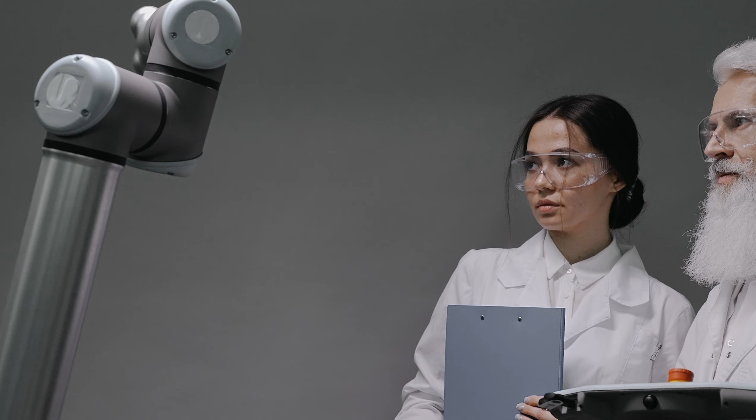Now, the main things that we need to understand when building our robot are the degrees of freedom, the kinematics, and the dynamics. Now, when we talk about the degrees of freedom in context of robotics, this refers to the number of independent movements a robot or a robot arm can make. Each degree of freedom represents a specific motion that a joint or link can perform.

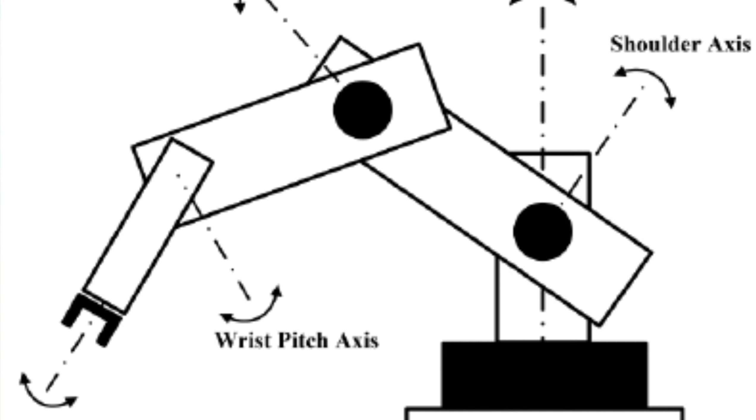For the robot arm that we're going to make, the number of degrees of freedom determines its flexibility and its range of motion. Since we're building a 5 degree of freedom, it means that the robot can move 5 different ways. Now, the 5 independent movements that will be involved in this robotic arm will be the shoulder rotation, shoulder elevation, elbow joint, wrist pitch, and wrist roll.

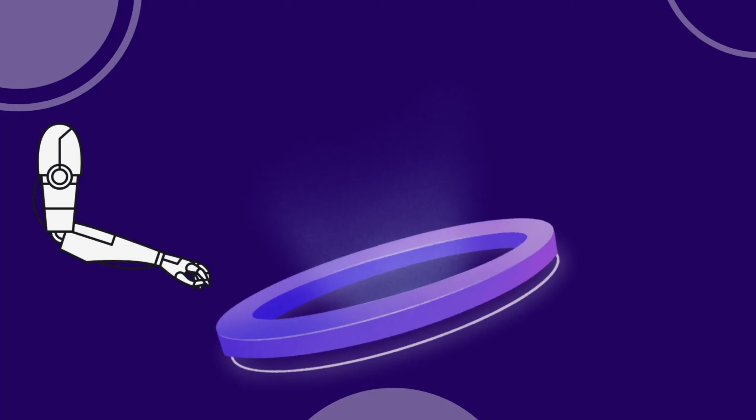Each of these degrees of freedom will enable the robot to move in various rotations and positions within its workspace. This will allow our robot to perform various tasks and maneuvers. When it comes to kinematics, this mostly deals with the study of motion in a robotic system without considering the forces or the torques involved. This mostly helps us understand how different parts of a robot move relative to each other.

In terms of the robot arm, kinematics is mostly applied in analyzing the joint angles and the link lengths to calculate the position and orientation of our end effector. Now, when it comes to robotics, there are 2 types of kinematic methods involved. There is forward kinematics and inverse kinematics.

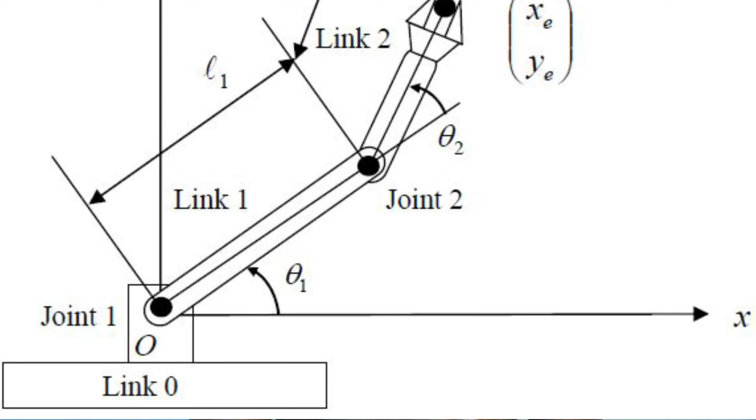When it comes to forward kinematics, we determine the position and orientation of the end effector based on the joint angles and the link lengths that we already know. To explain this further, if we're already given the joint angle and the link length, we will use that to calculate the position of our end effector. This is mostly used when we need to calculate where our robot arm should move to perform a task.

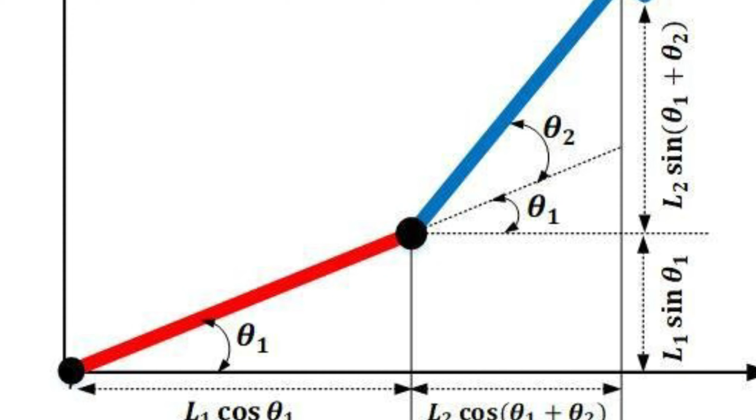When it comes to the inverse kinematic method, it's the opposite of forward kinematics. This is when we know the position and orientation of our end effector, but we do not know the joint angles that will produce that position and orientation. This method is mostly used in planning and controlling robot movements precisely, and for our robot arm, it's a method that we're mostly going to use.

Our robot will be Arduino based, so when we have the desired coordinates of our robot arm, we will use that to find the needed angles that will move our robot in the desired position. And when it comes to programming, inverse kinematics is mostly used.

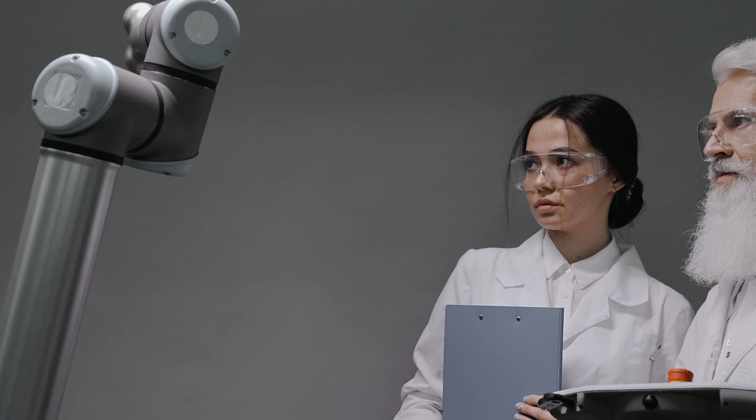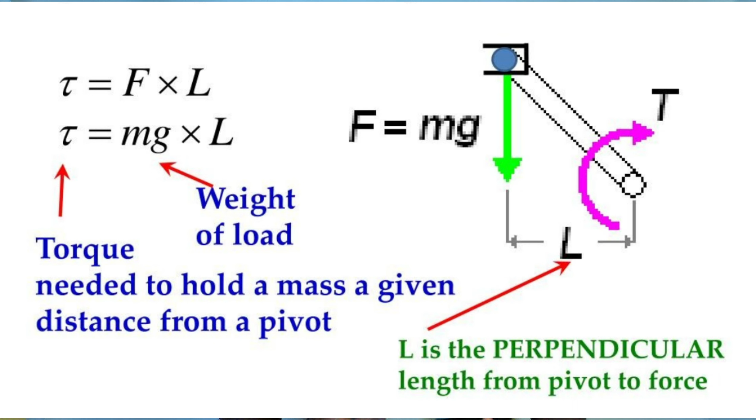And the third thing that we need to know and understand is the dynamics of a robotic arm. When it comes to robotic dynamics, this mostly concerns the study of forces and torques applied to a robot arm and how these affect its motion. It's essential to understand how the robot arm responds to external loads and how to control it effectively. Robotic dynamics mostly shows us how velocity, acceleration, and torque are related within our robot.

This helps us set limitations in which our robot can operate. These equations will help us design algorithms that will help our robot move smoothly and more accurately. Dynamics is crucial for several reasons.

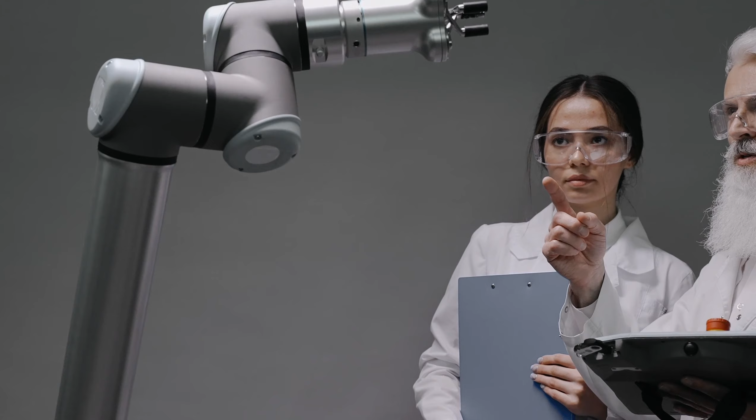Number 1, motion control. Understanding dynamics allows you to control the robot's movements more precisely. For example, you can adjust the motor torques to ensure smooth and accurate motion. Another one is safety. Dynamics analysis helps us prevent overloading of joints, which could damage the robot or pose safety risk. This is very important if we want to build our robot to be maybe applied in manufacturing, the mines, or in agriculture.

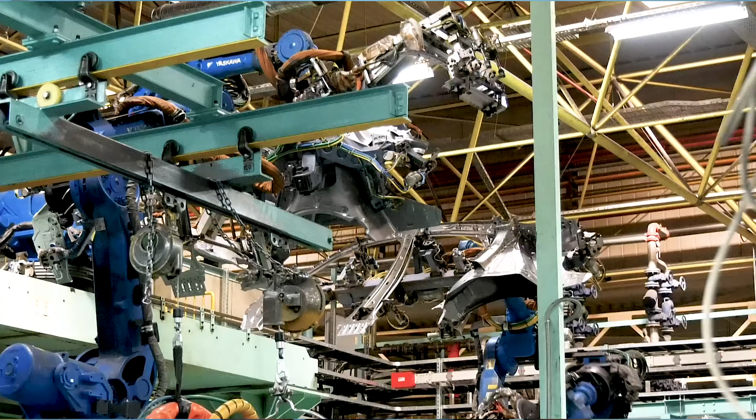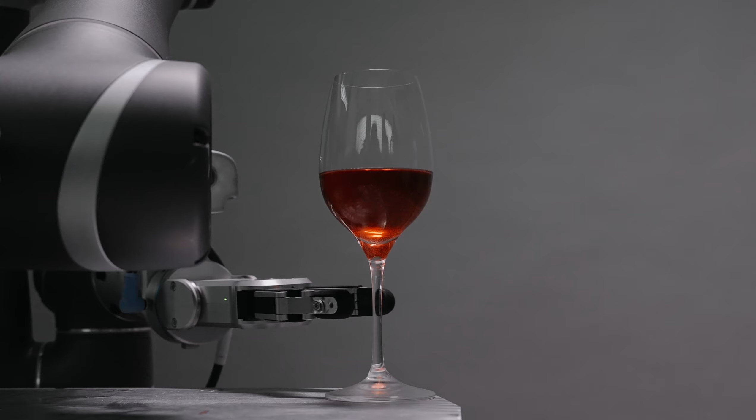Another reason why it's crucial is because of energy efficiency. Efficient motion planning and control based in dynamics can help reduce consumption, which is important for battery-powered robots. Another crucial reason is collision avoidance. Dynamics can help predict and prevent collisions by adjusting the robot's path or stopping it in time.

And lastly, feedback control. Dynamics information can be used in feedback control systems to correct errors in real time, improving the robot's performance. Feedback control is mostly important when it comes to automation, when we want our robot arm to perform specific tasks without the need of a human being to direct it. It's also important when it comes to machine learning and AI. The more the robot learns from the feedback, the more it will smoothly and accurately perform its tasks.

Now, for this robot design, dynamics is crucial because it's mostly going to be controlled through programming. Understanding dynamics will help us design and create the needed code that will make the robot perform smoothly and accurately without any issues.

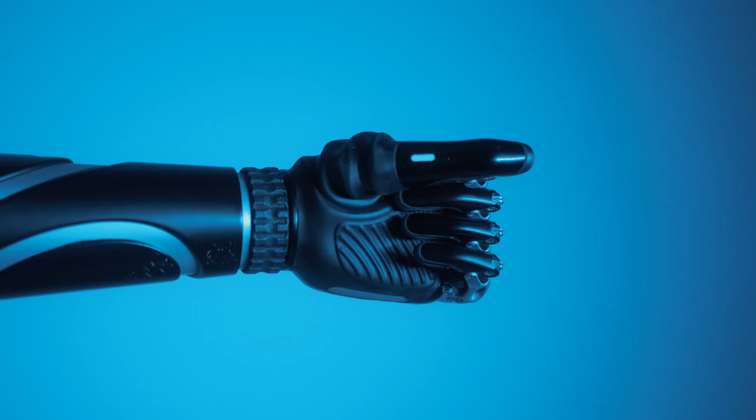Now that we've talked about the kinematics, the dynamics, and the degrees of freedom, we now need to move on to the end effector. The end effector is the part of the robot that is going to interact with the environment. For example, if we consider our arm to be a robotic arm, our hand will be its end effector. It will interact with the environment. The principle is the same when we talk about robotic arms.

Essentially, most robotic arm end effectors are similar to hands, but I would like us to design something a bit different. This is where the application of our design comes in. Now, when it comes to applications, it's important and fun to build robots as an engineer. But as an engineer, we also need to solve problems. So I would like the end effector for our robotic arm to at least solve one or more problems out there.

If possible, and we have enough materials, we'll design more than 2 end effectors that we can apply in the real world. Hopefully, in our second video, when we're physically building our robotic arm, I'll probably design a second end effector if we have the needed material for it.

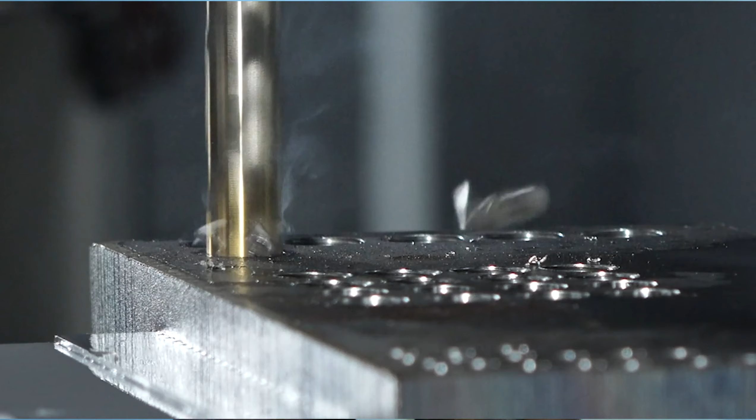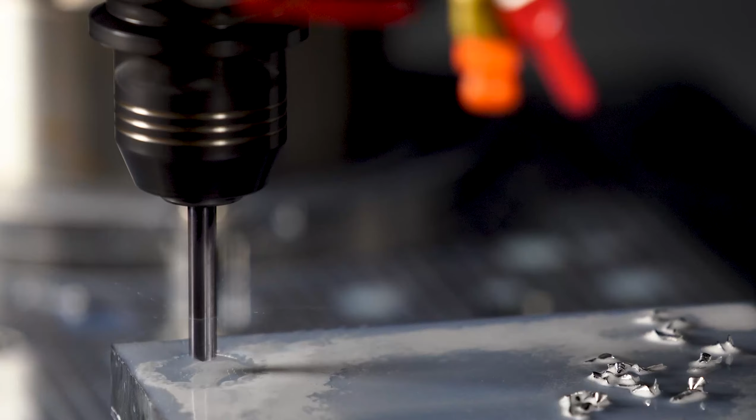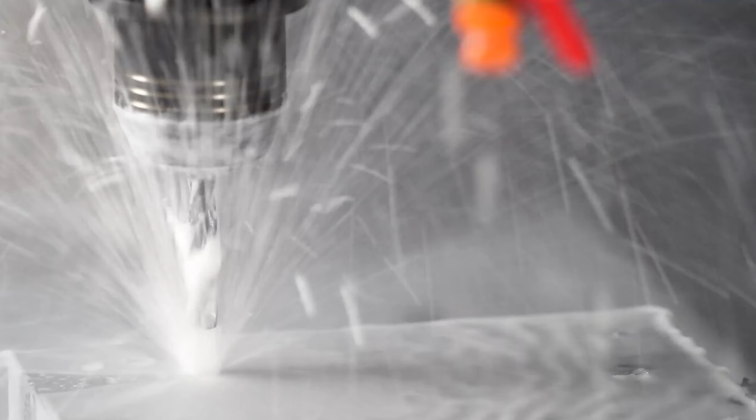Now, the reason why I selected drilling is because when it comes to mining or machining or agriculture, it would be good to have a robot arm that is automated to perform certain processes accurately. So when it comes to drilling, maybe drilling into an ore mine to get a sample or drilling into some wood, that would be beneficial in most industries.

It is also beneficial if our robot arm can drill into more than one part, meaning that if we would want it to drill into, let's say, more than 3 pieces, we would program it to do so, which will reduce time and make the person's work a bit more efficient.

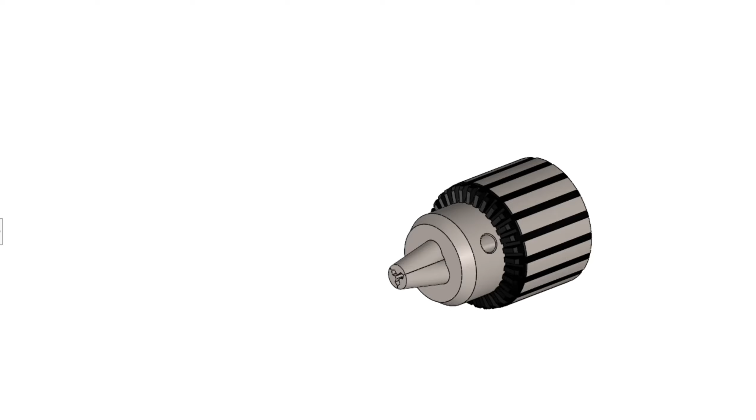It will be our base model for it, but I think over time, when it comes to finally building our prototype, a few design changes will be made. So now let's go to designing our robot arm. Like I said, I use SolidWorks mostly, but hopefully in the upcoming videos, I'll use other CAD softwares like Creo or CATIA. But for now, we're mostly going to use SolidWorks.

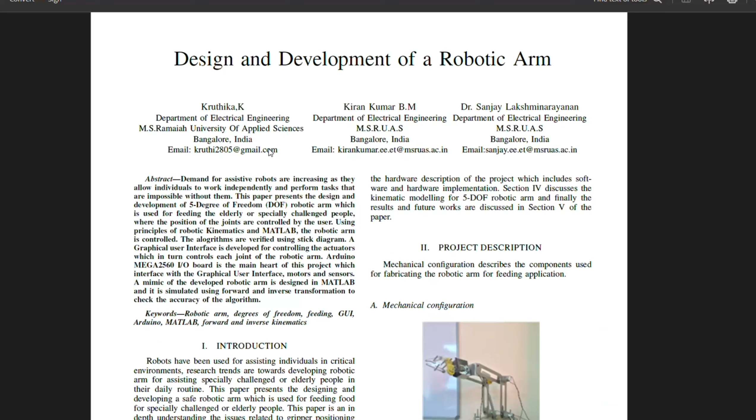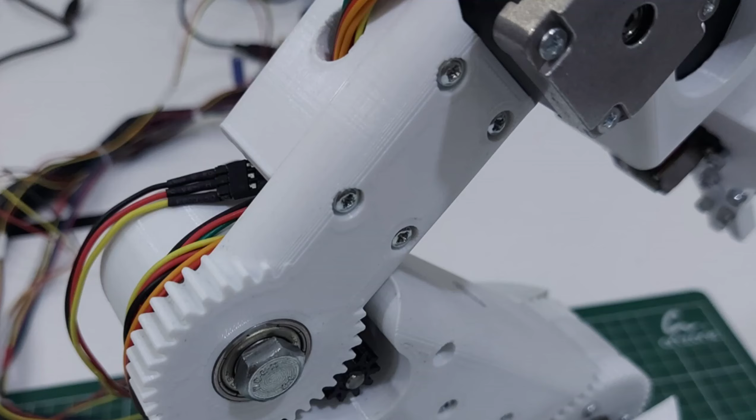I first started by doing research on the types of robot arms out there. This made me decide to build a 5 degree of freedom robot. During my research, I also used it to theoretically calculate the torque forces for each link. This helped me decide on the motors to buy. After looking at a lot of 5 degree of freedom robots, I then designed a 2D sketch on paper to help me envision the robot that I want to build.

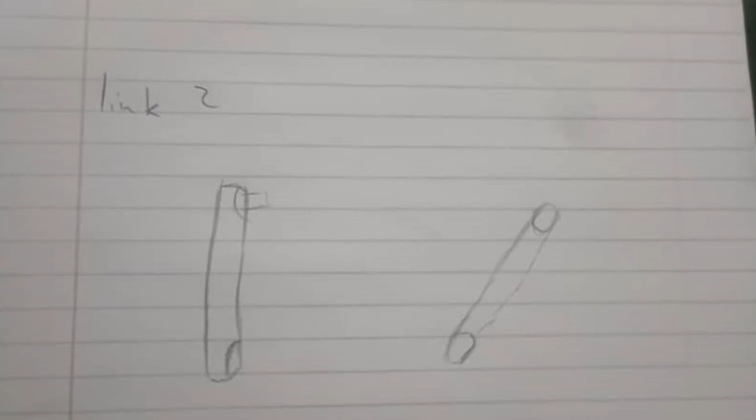I made it very simple so that I do not have any problems when it comes to 3D printing or CNCing each part. After that, I then went on to SolidWorks to build a prototype. Please note that this design is still under modification and simulation testing, but hopefully by the time the components arrive to physically build it, I'll have a final design to build.

Now, we can calculate the inverse kinematics and the dynamics of our robot arm, but it's also important to simulate how the robot arm will work in certain operations. And this is where finite element analysis comes in. So for the finite element analysis, I mostly used ANSYS Workbench, and I mostly checked its temperature, the modal analysis, and the static structure to see how loads are applied.

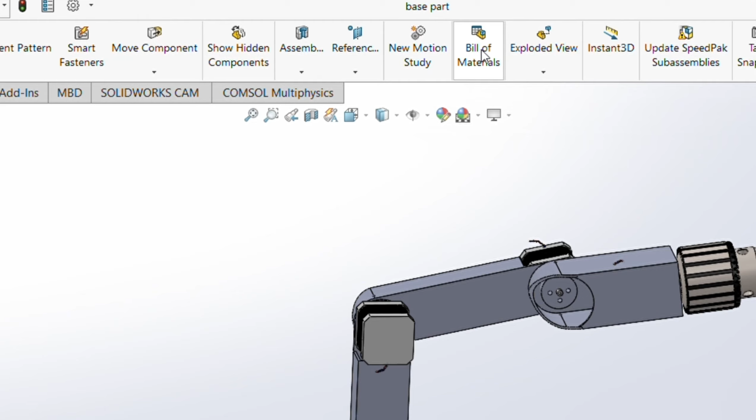So then, we come to what is known as bill of materials. This is a comprehensive list of components and materials that are needed to build our robot. In SolidWorks, you're able to create a bill of materials table of the assembly that you just made. The manufacturer will be able to know the quantity and the parts needed to build your final design.

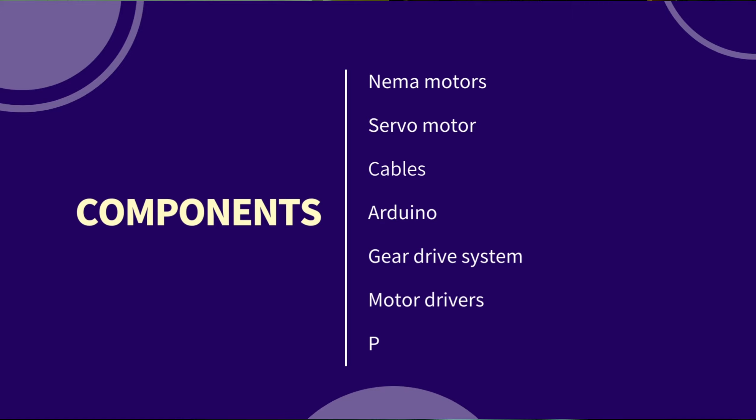So then, the main components that we'll need for building this robot are 5 stepper motors, I picked NEMA 17 for this, 1 servo motor, cables, Arduino Uno, gear drives which will help in power transmission and torque increase, motor drivers for the NEMA 17 motors, and a potentiometer to control the speed of the motor of the drill. Because when it comes to drilling into a material, we need to know that the harder the material is, the slower the speed is required. This is mostly to help us preserve the material and to prevent things like friction that might cause deformation and wear and tear of our tool.

One of the things that I want to try and do is program our robot to be controlled through a controller. No, not that controller, but a sophisticated controller. Most companies custom make their controllers, but I'll probably get an Xbox controller and use it to control our robot arm. If not, we can use inverse kinematics, where we put in the position of our end effector and its orientation, and we can then use the needed equations that will be provided to calculate the link angles.

When it comes to the material that will mostly hold on to our robotic arm, since it's a prototype, I'm considering 3D printing it or CNC machining, but we shall see which is actually cheaper. At the end of our second video, I'm also going to talk about the final cost and the machining time and manufacturing it took to build this prototype. So that's it for part 1 of our video. I hope you guys liked it and you understood a few things about robots.